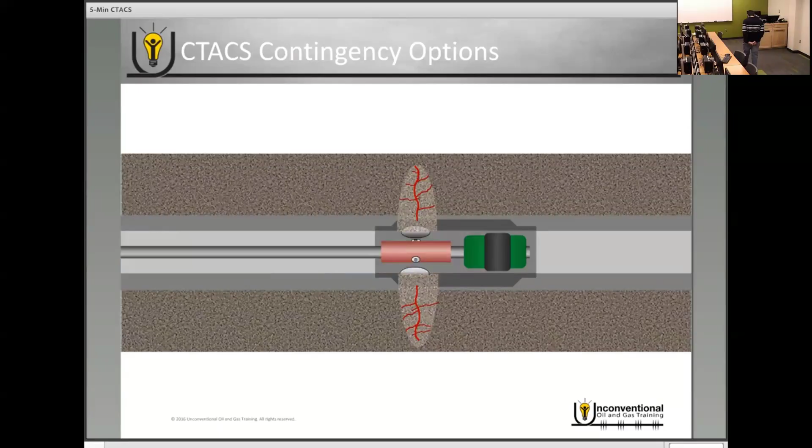So those are great videos to learn the basics about the process.

When this technology was coming out, there were several issues, the challenge was to make sure the packer doesn't leak and seals properly to hold enough pressure to fracture that stage. The frac sleeves were more rigid separation units, so it was hard to get a packer to do the job. But nowadays, with equipment evolution, we're able to hold enough pressure to fracture the stage.

But you still hear stories many times. Even I heard from the Forge project, a geothermal project in Utah operated mostly by the University of Utah, who make their data available online for scientists to do projects on. I heard there was a stage where they pumped to the highest pressure they could and didn't get breakdown. So many times the equipment you're using is limited, and you need higher power but are limited by your equipment's capacity. It's a common thing, not as uncommon as it sounds, to have trouble with a frac stage.

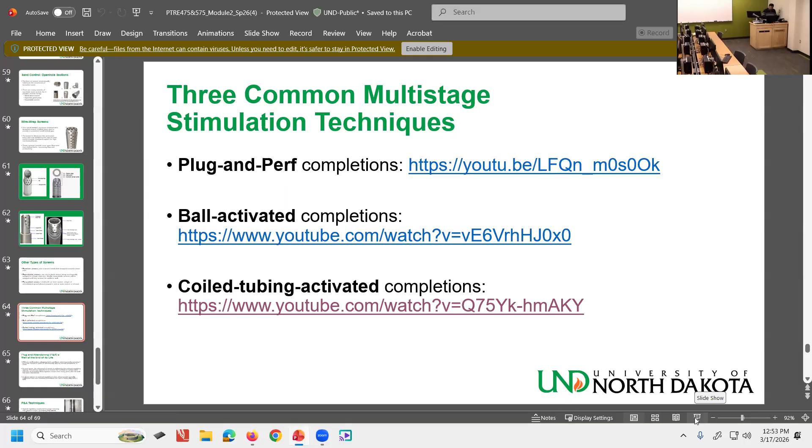So that's it with this slide — three ways, and there are more, but these are the three main ones.

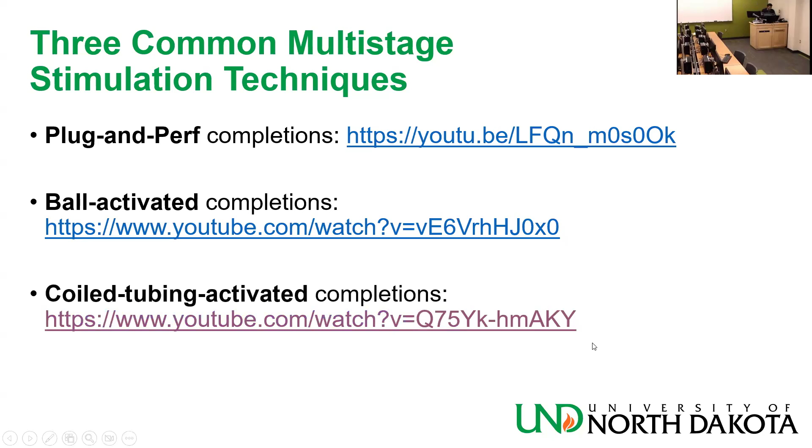Another subtopic we are going to see in this module, which is a very applied module that students like, is plug and abandonment, the well at the end of its life. Plug and abandonment is a more important topic than what students perceive it is.

The reason being is something we see a lot in West Texas. We see that in areas with mature oil and gas activity and more or less recurrent activity, you have wells that have been plugged and abandoned. They were left like that for 35 years. Then somebody comes over next to those wells and starts a water flood.

So the pressure builds up. Then suddenly the plugs in those wells fail, and the well starts spewing brine, for instance. Or even worse, starts spewing methane or oil, something that can contaminate the nearby environment.

I think there is a trademark name for those wells. They call them zombie wells. I say it's trademarked because it became a major topic in a past election for the Texas Railroad Commissioner. You probably know, if you took other classes from me, that the regulating authority in Texas for oil and gas is the Texas Railroad Commission.

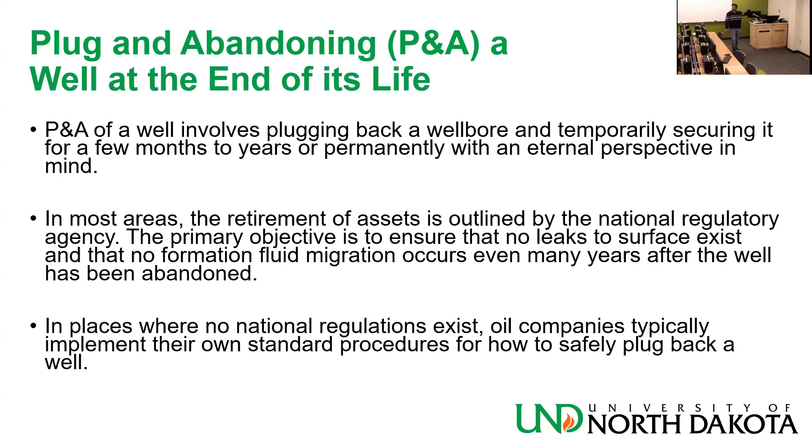There are several techniques. You want to ensure that adjacent strata, particularly freshwater aquifers, are adequately isolated. In most cases, a series of cement plugs is set in the wellbore, with an inflow or integrity test made at each stage to confirm hydraulic isolation.

The well designer may choose to set bridge plugs, like the one we see here, which is a man-made devised plug, let's put it this way, in conjunction with cement slurries to ensure that higher density cement does not fall in the wellbore.

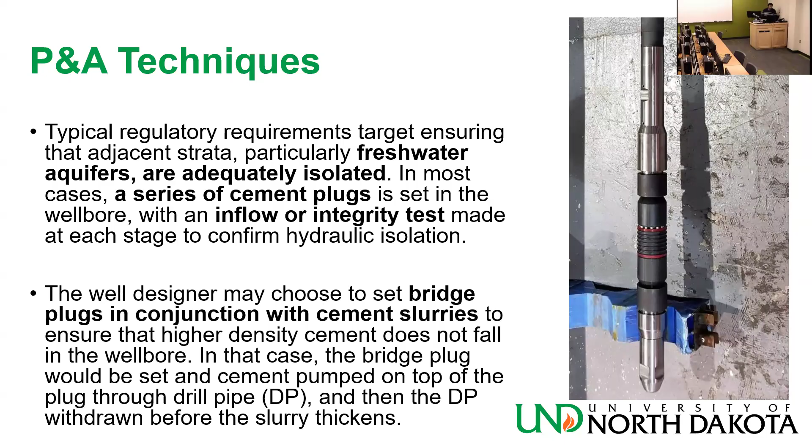In that case, the bridge plug would be set and cement pumped on top of the plug through drill pipe, and then the drill pipe withdrawn before the slurry thickens. So you basically run the drill pipe, pump cement, withdraw the drill pipe, and let the cement set.

And you hope that it will be enough to hold back any pressure increases that the well will face in its post-plug and abandonment life.

A rule of thumb, economically speaking - there's an old school rule of thumb. I don't know if it's still the case. Could be. Let's see.

When you plug and abandon a well, there's some equipment you can pull out from the well that are not permanent, like some retrievable packers, liners, etc. You can resell those at a discounted price, and there will be people interested in buying them. It's expected that you're going to make enough money out of that to cover the plug and abandonment expenses of the well. So many times, and some of you may be taking senior design classes, it might be a logical assumption to make that the money we take out from what we're able to sell as used equipment is going to be enough to cover the expenses for the plug and abandonment.

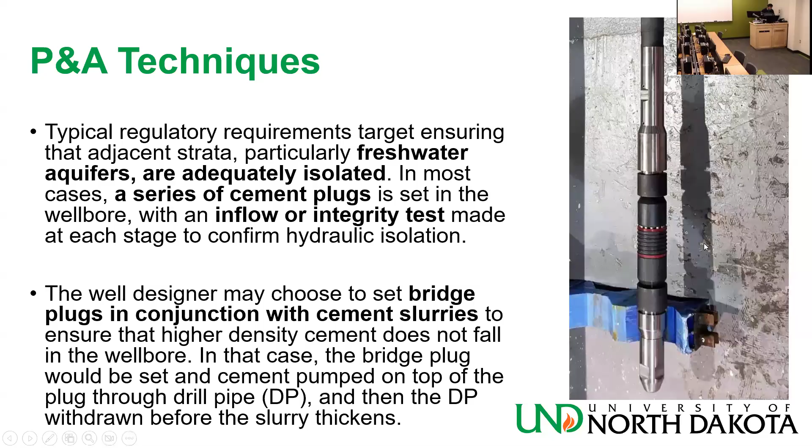And like I said before, there's a professor in Texas who is researching - it's not the only thing he does, plug and abandonment, but he was able to put together a research consortium for plug and abandonment. So these are serious stuff, this is a serious subtopic. Some of you may get a job in this area - again, it wouldn't be a bad job to have.

Now, when it comes to well integrity, we are talking about the several ways this plug and abandonment configuration can be compromised. Here we have a simple plug and abandonment schematic that shows a section of cement pumped down a well that is cased and cemented.

And we see the various ways our plug and abandonment can fail. We see here something like 6 ways our plug and abandonment configuration may fail. So we have steel, cement, rock, and then another cement here - that's the cement of the plug and the cement between the casing and the rock. These are two different cements, and they're going to be very different types as well.

So one way is that we can have flow in the interface between the casing and the cement - the casing and the cement between the casing and the rock. There might be a microannulus there that can lead to fluid coming out towards the surface. That's one way you can have wellbore integrity compromised, and this is mechanical degradation, like with stresses, like it cracks - a fracture basically. A microannulus is a fracture, it's a tensile failure.

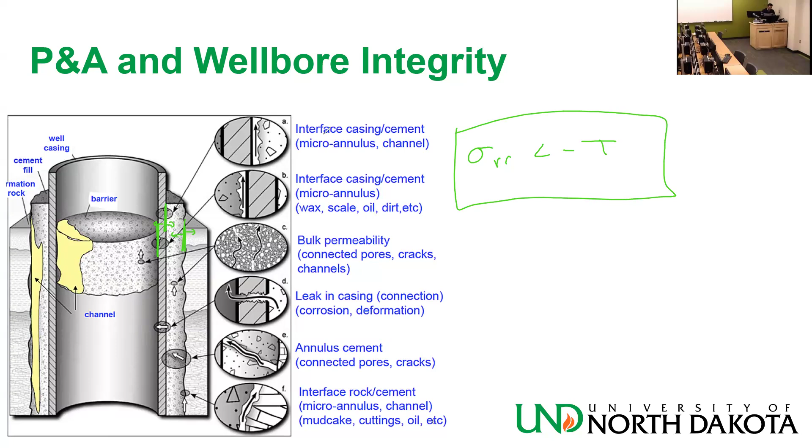Appropriate barriers have acceptably low permeabilities, same or lower than the cap rock permeability. The rule of thumb is that you want to be between a nano-Darcy and a micro-Darcy. Nano-Darcy is less than the permeability of shale—several shales have higher permeability than that and are still considered low permeability, basically like glass. From historical industry experience, as a rule of thumb, 100 feet of good cement with permeability less than 1 microdarcy should be considered sufficient.

That may not always be the case. Now, if you are in an area where the plug and abandonment regulations are very strict and well defined, they basically dictate how you do plug and abandonment. So if they want, say, 200 feet of cement that you can test and give specific results, this is the procedure that you need to follow.

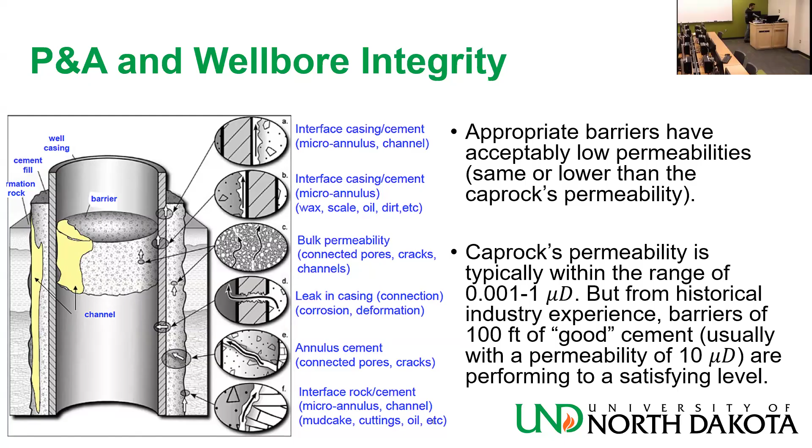And finally, module 2 summary.

We learned about the main completion types. We did routine pipe calculations. For some of you, this was a revision from other classes you took with me.

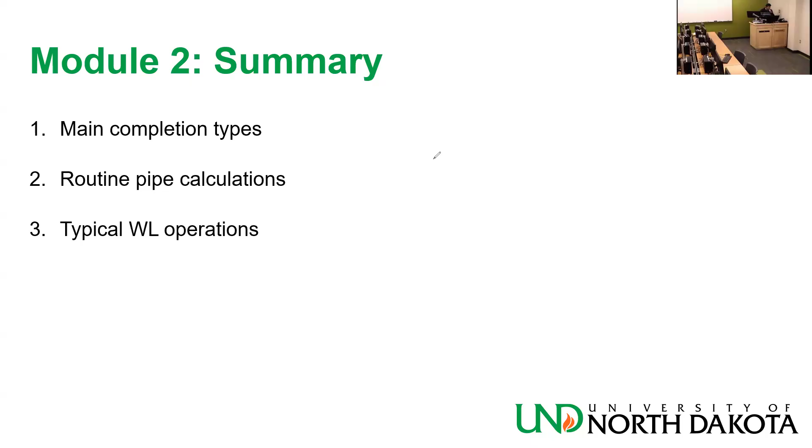We talked about typical wireline operations. It was a bird's eye view. We talked about perforating and spotting acid.

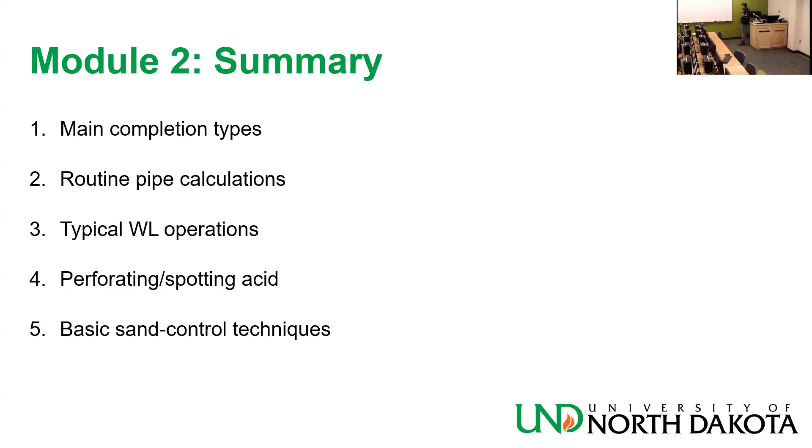We talked about basic sand control techniques, how to keep sand away from your well. Sand production is a big, big headache for several operators.

And we talked about multi-stage hydraulic fracture stimulation basics to set the stage for the next module, which will be heavily on hydraulic fracturing. We needed some basic understanding of the relevant operations.

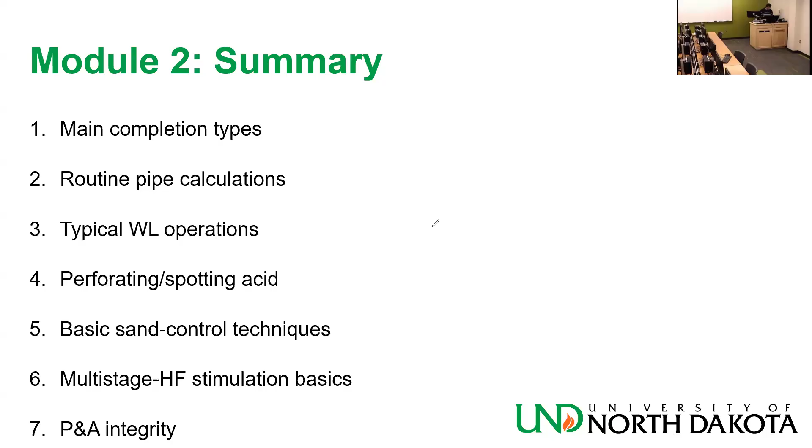And finally, we discussed plug and abandonment integrity. Yeah, and that was module 2. 69 slides.

Any questions on module 2?

Just about the plug and abandonment question. Yes sir. So for example, does the oil and gas division dictate the regulation for plug and abandonment, or is it the company who owns the production well? Both. The answer is both.

If there is a regulating agency in your state and it has specific rules for plug and abandonment, your company has to follow those rules. But on top of that, your company has protocols, and they may add to those rules. Whatever protocols your company is following should at minimum satisfy the state's rules, and beyond that it basically depends on company policy.

Okay, thank you. Yeah, for instance, you are in Ohio. Ohio has a long oil and gas history, so without knowing for sure, I'd expect Ohio to have fairly diligently written plug and abandonment regulations.

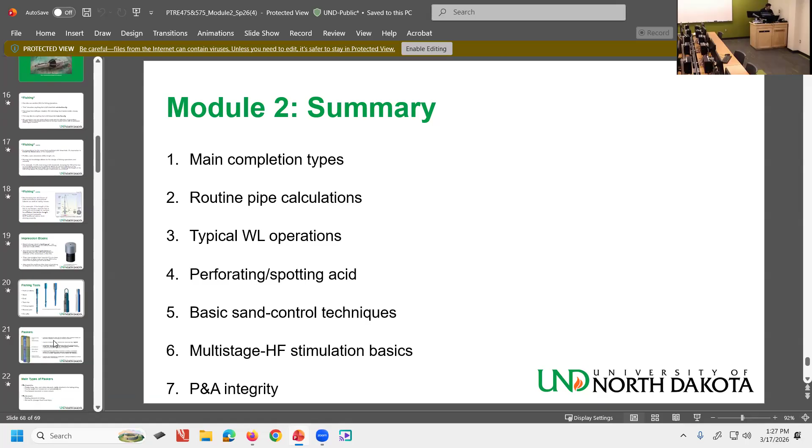Okay, so exam 2, sometime next month, will basically cover from slide 21 of Module 2, where we start with packers, all the way to wherever we make it by the second exam.

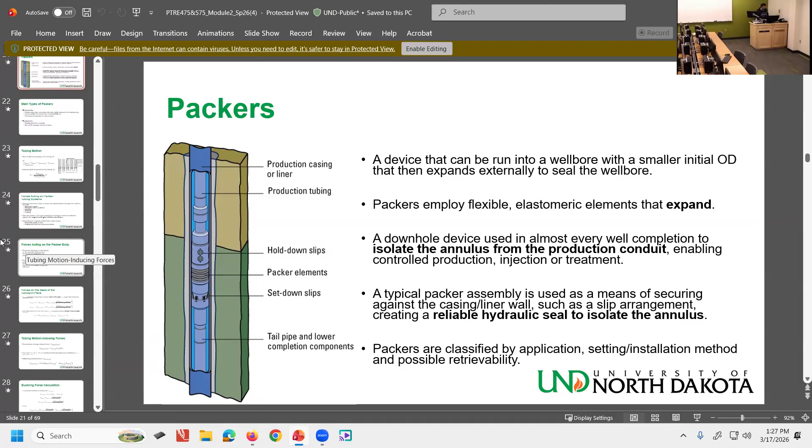There are some things that are not that important, and I'll discuss that during review for that exam. But some things we went through fast intentionally, since I know you're seeing them in other classes. I don't expect you to know this stuff in much detail. I'll be very indicative of what things you need to know pretty well.

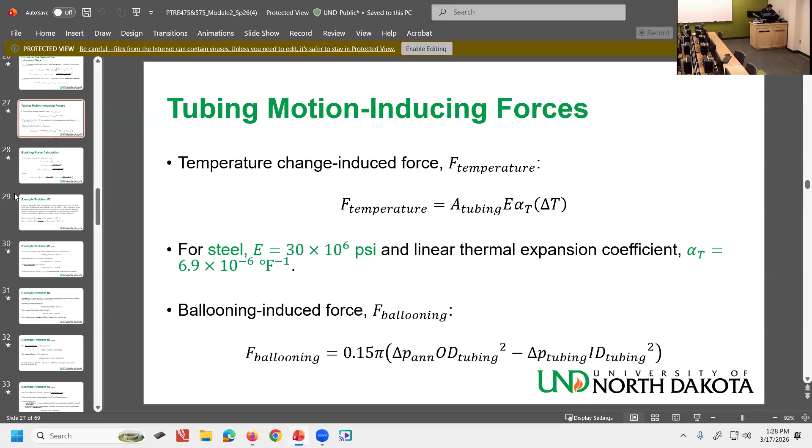Okay, so now it's time for us to start Module 3, which will be the biggest and arguably the most important module we'll go over in this class. I believe it's gonna be very interesting to you guys: hydraulic fracturing operations.

Virtually every well drilled in the US today is being hydraulically stimulated. It's almost part of the manufacturing process. Every well that is drilled will have to be stimulated at some point in its life.

And I'll tell you from my not very elaborate experience, it's better to do it early. It's better to stimulate the well as early as possible. It gives you benefits versus producing and then going later after a couple of years, 3 years or so, to stimulate. It's better if you do it early.

Besides drilling, hydraulic fracture costs are the second biggest chunk of money you're going to spend on your well. Drilling is the biggest operation, taking like 85 to 90% of the cost, I believe. Of the remaining 10%, a big chunk goes to hydraulic fracturing, and then the rest goes to workovers, lease operating cost, etc.

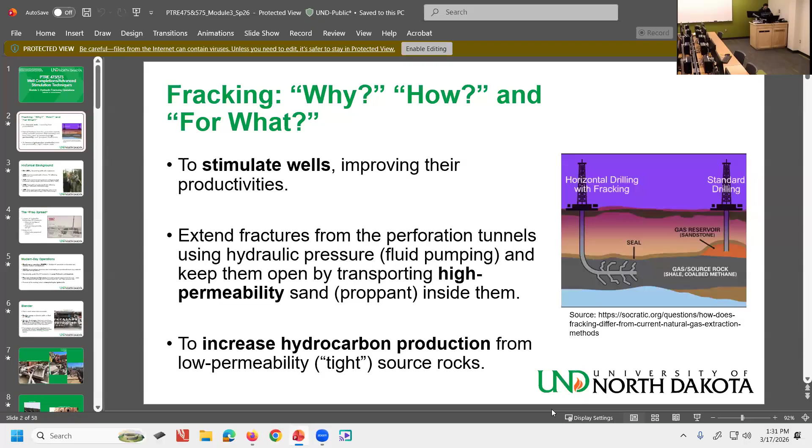Those were good days before the oil collapse. In conferences, service companies would throw parties, invite our professors, and the professors would take us with them. It was crazy.

Anyway, fracking: why, how, and for what? You may have heard about it in the news, particularly in the last decade, from different interest groups either advocating for it or against it. They use the word fracking, and there's debate about whether it should have a K, since there's no K in fracturing. Fracking was a bit of an unfortunate nickname. Personally, I think whether we like it or not, we should write it the same way since we're all talking about the same thing, but that's just my opinion.

I know people write it as frac-apostrophe-ing, like the Secretary of Energy, who's a founder of the biggest fracturing company in the US, Liberty. The biggest company that solely does hydraulic fracturing as a service company is Liberty Oilfield Services, based in Colorado.

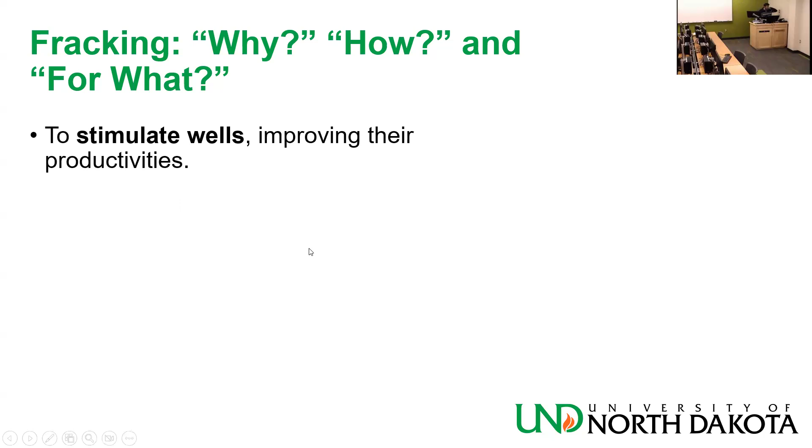Now, why do we fracture a well? The reason is to stimulate production, to make it produce more. We create fractures from the perforation tunnels we mentioned earlier by pumping fluid, and we keep these fractures open using high permeability sand called proppant. Proppant is what props the fractures open — that's why it's called proppant. For people who don't speak English as a first language, like me, that's the meaning of the word: it props open the fracture and keeps it open. Because when you remove the fluid pressure, the fracture wants to close, so you put proppant there and it keeps it open.

Proppant technology is also a very big part of the industry. The 2024 SPE president works as technology vice president of Carbo, a big proppant supplier for hydraulic fracturing companies. By the way, I'm not 100% certain, but I believe when the people who created Liberty left Pinnacle, their software was bought by Carbo, because Halliburton bought the company except for that software, which went to Carbo, if I remember well. So they are all related in the history of hydraulic fracturing, or at least its modern day history.

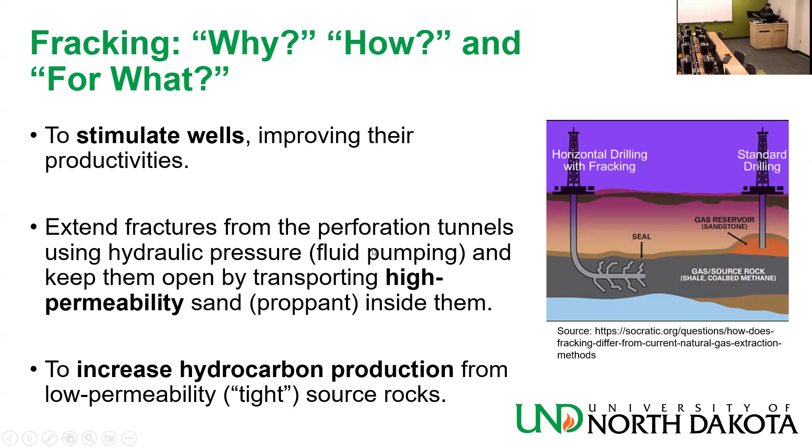Now, historical background.

Fracturing has a longer background in history than you'd expect. It goes back to the mid-1800s, when people used to drill wells. They started drilling wells in 1859. By 1863, there was a boom, producing like crazy in Pennsylvania. By 1865, the area was depleted, and people were talking about the end of oil, that we're running out. Some people still talk about that today.

Back then they understood that you could go down the well with explosives, shoot them down, and create a small explosion at the bottom of the well, which could temporarily increase production. This was done with torpedoes, and there was a lot of technology developed back then related to that.

I'll show a picture of somebody here. Shamel, do you know who that is? No? Maybe a Schlumberger brother? Say it again? No. Actually, American students know this person.

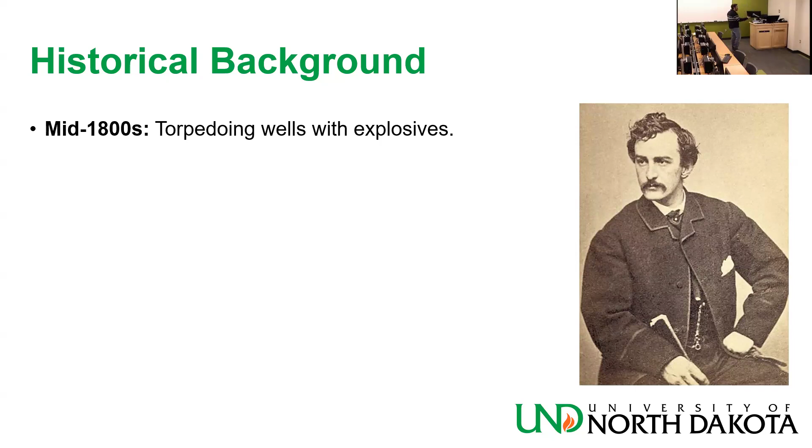But that was back in the 1800s. People would torpedo wells to improve production, and there were some gains made, but not very sustainable.

In 1929, in Texas, the first horizontal well was drilled by somebody ironically called Robert E. Lee. During the Civil War, the general of the South, the Confederates, was also called Robert E. Lee, but it's not the same person. Anyway, there was a patent for drilling a horizontal well from the 1890s, I believe 1891, but the first actual horizontal well was drilled in 1929.

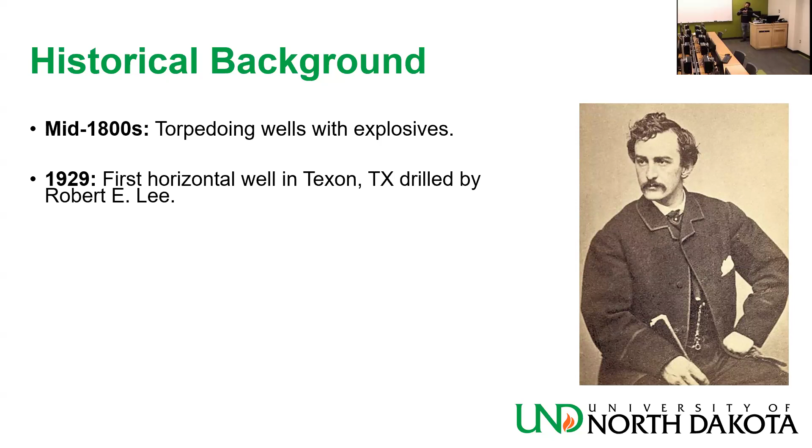The horizontal well helped a lot with having more surface area of the reservoir exposed to the wellbore.

In 1947, in Hugoton Field in Kansas, there was the first hydraulic fracture job, in the sense that hydraulic comes from fluid. Fluid was used to stimulate the well, because torpedoing the wells was stimulating production as a reservoir stimulation process, but it didn't involve fluid. In 1947, they used napalm, interestingly, and stimulated the wellbore there. I'll show you a picture of that later. This was basically the first time a process called hydraulic fracturing was used.

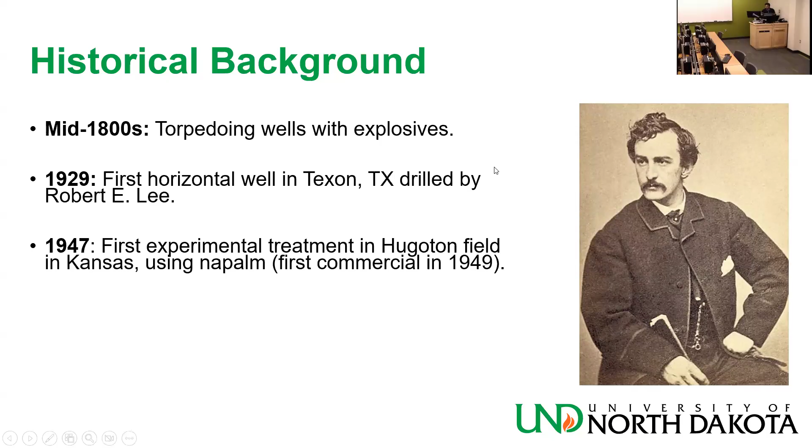In fact, I think it was called hydrofracking back then. If I remember well, a very famous paper published two years later described something called hydrofracking, by Clark, in SPE. In 1949, it was the first commercial hydraulic fracture job in the same field. The well was vertical, but they used fluid, pumping it at very high pressure to create fractures and stimulate production. They didn't use any proppant or anything, but literally speaking, it was a hydraulic fracture process.

Now, in 1982, here is the catch. There was a very smart graduate of petroleum engineering from Texas A&M University. He graduated first in his class, and I think he had a perfect GPA. He was smart like some of you guys, and he went on to build his own company. He was from Galveston, the kid of Greek immigrants. His name was George Mitchell. Mitchell was actually a made-up name, because he had a long Greek last name that the mailman couldn't understand or read, so he simplified it for everyday life.

So anyway, this petroleum engineer had an idea. Back then they were drilling through shale, and they knew shale had oil, but they didn't know how to produce oil from it, because cores brought to the surface from shale would be like glass oozing with oil.

You have oil coming out of it, oozing out, and you'd be like, I wish I could produce from this rock. That's where oil is made, but it's low permeability. I wish I could produce it. It would have been a great idea.

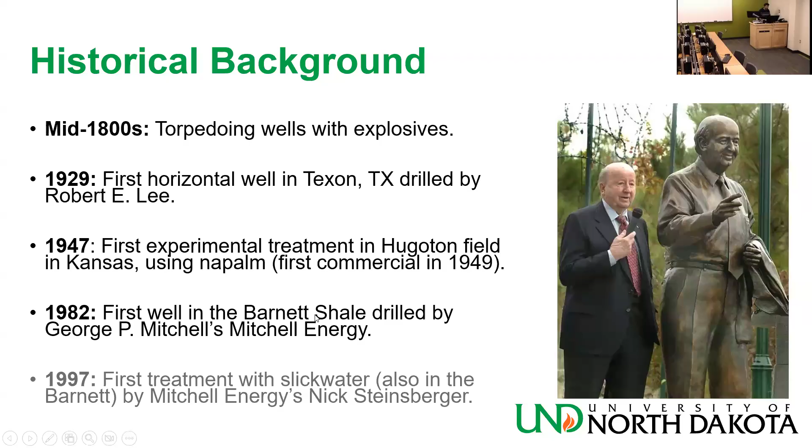In 1997 was the first treatment with slick water, which is basically what we call today hydraulic fracturing. The videos we saw in the previous module from Aaron Barton are very similar to what we call today hydraulic fracturing. So in 1997 he had this big success with the first slick water treatment.

It was run by somebody called Nick Steinsberger, who by his own admission was a grade C student at the University of Texas. He graduated, didn't have a job, went backpacking in Europe, came back, attended Career Day in Texas, and got hired by George Mitchell. A few years later, he did the first slick water fracture treatment, which was very successful.

And that led to the shale boom in the Barnett Shale. All of them now are very rich.

Nick Steinsberger's son was a student at University of Texas a few years behind me, like 5 years behind me or something. We never really interacted because I was already in grad school when he came over. But those people made a lot of money out of the whole process.